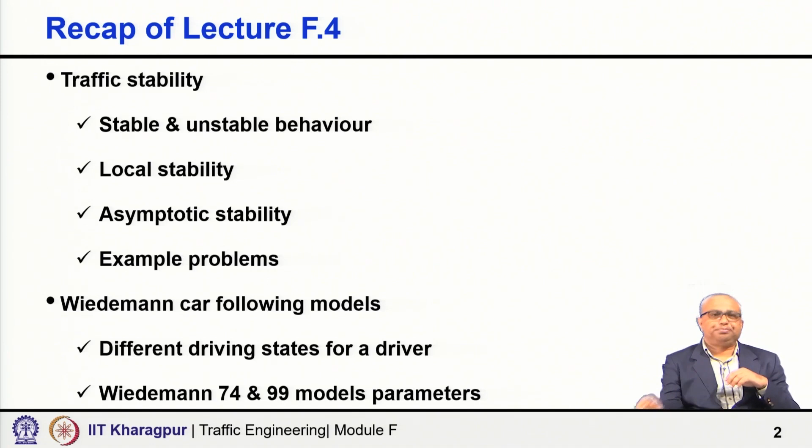With this background, today we go to a different topic, traffic simulation. Today's lecture covers some elementary aspects of simulation: what a system is, the different ways a system can be analyzed, and going up to what is traffic micro simulation. The next 2 lectures will specifically focus on traffic micro simulation.

When we talk about simulation, basically we are trying to analyze the system. So the discussion should start with what is a system. There are many ways a system can be defined. I have mentioned a simple way of defining it: a collection of entities which act or interact together towards accomplishment of some logical end. That is a very simple way of defining the system.

It is a collection of entities, not one but multiple entities, individually and collectively. They act and interact together through interactions to help accomplish some logical end, or collectively they achieve some objectives. You can also say entities or activities meaningfully connected, individually and collectively achieving the goal. So multiple entities, individually and collectively, they work, they interact with each other, and finally accomplish some logical end or achieve the given goal or objective.

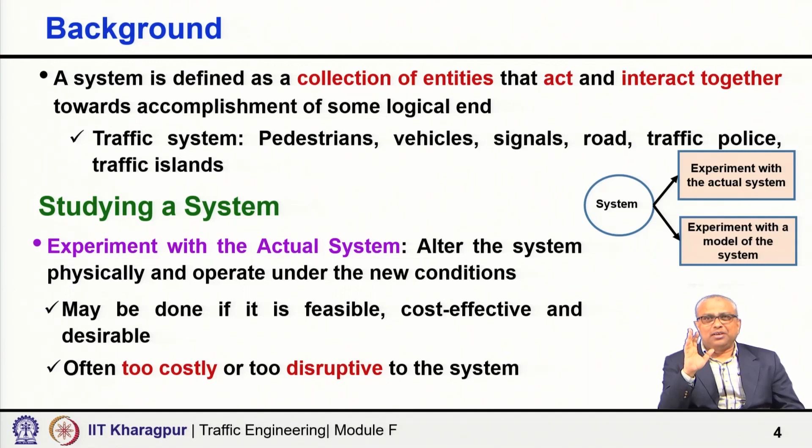So the alternative is the other one: experiment with a model of the system. We do not play around with the actual system, but we create a model, we build a model to represent the system, and then study various proposed alternative configurations with that model. So, not playing with the real or actual system, but playing with the model of the system.

That is fine, and there we can see different alternatives. You can see if I do a channelization, proper channelization in a signal at an intersection, how it works. If I use a traffic signal, how it will work. If I have an elevated corridor or some grade separator, how it is going to impact. Number of cases, number of possibilities you can check, you can evaluate, and then you can take a call.

So the experiment with the model of the system is much more practical, the scope is much bigger than the scope of playing around with the system itself.

So this is suitable when the system does not exist. There could be something that today does not exist. We are simply talking about a planning stage and we want to take a call. We have a forecast volume, we know what the turning movement will be, and this new road, once it is built, this new junction is going to come up. So it may not exist today, there could be many other examples.

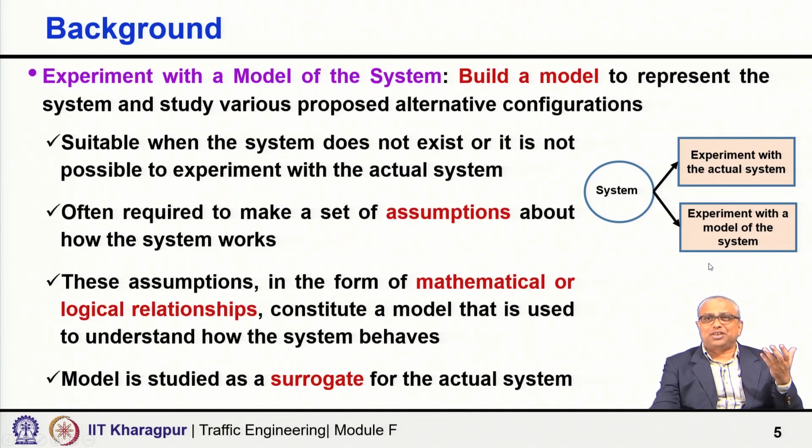If you go ahead with the model, within this we have experiment with the actual system, what is its scope, and the alternative is experiment with the model of the system. If we take up this experiment with a model of the system, again we have two alternatives. Either we develop a physical model and work with that, or we develop a mathematical model, not a physical model, and work with that.

So what is a physical model? We are developing a physical model, a replica - physically we are making something, and it is useful to build physical models to study engineering or management systems. Examples: clay cars in a wind tunnel - you make a model, the whole thing is a model, not the reality, but we create cars, we create wind tunnels. You can also do that for a rail system, how it works, you can make a physical model, or even a cockpit disconnected from the airplane may be used in pilot training.

You show them a photo, but you can show them a model also, right. You can even tell people, okay, go inside and sit there, see how the cockpit looks like, how it feels. So that is possible in many ways. The physical model range is quite wide, not just one thing. Many possibilities are there, and they're often very useful as well.

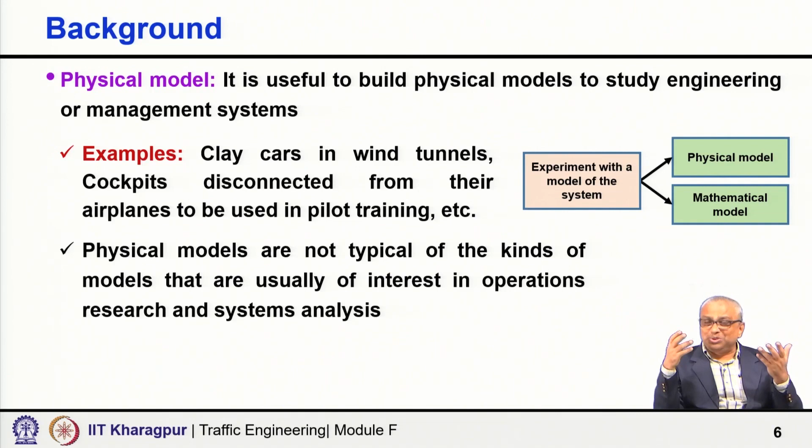So for operations research and system analysis, what we mostly do is go for a mathematical model. What is a mathematical model? A mathematical model represents a system - again, all models try to represent a system, physical models also try to represent a system. It represents a system in terms of logical and quantitative relationships that can be manipulated and changed to see how the model reacts, and therefore how the system would react, provided the mathematical model is a valid one.

The same model under some condition may be valid, under some other condition may not be valid. It all depends on what assumptions you are making, where you are applying the applicability of the model. Any mathematical model has its own application domain. I have taken an example here to explain this - maybe better examples are possible, but I have taken something simple.

You are all familiar with this: d equals distance travelled equals V, speed of vehicle, and t is the time spent travelling. Now what I am trying to show you is I am trying to create a scenario where this is a valid model, and where this is not a valid model. I am trying to create scenarios to explain this.

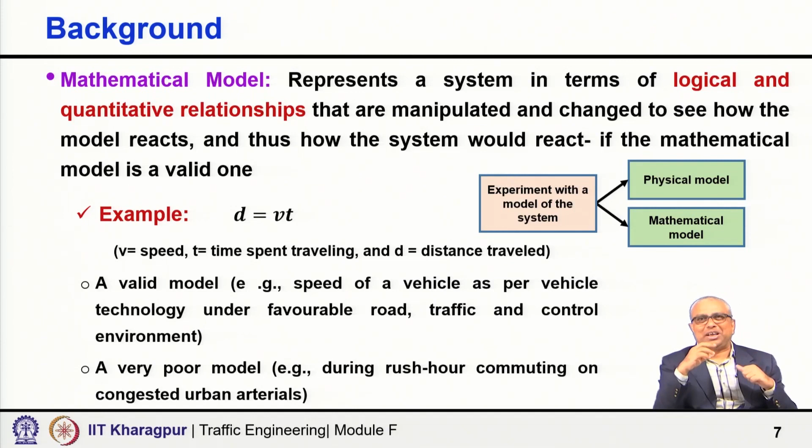So the applicability of the mathematical model is very important. Now suppose you choose the mathematical model for most cases, that is widely used, especially for the kind of work we do.

We cannot do every experiment in the field, because it's a public road, and once you are fairly confident about something, final field experimentation will be required. But the whole thing cannot be studied only based on field experimentation. I can do the final test in the field once I am confident, to see how it works in the real world. But I cannot do the whole experimentation every day, I cannot keep changing something and experimenting with people, because there are safety implications and other implications as well.

So suppose we take a mathematical model, then there are two possibilities: one is we can go ahead with an analytical solution, or we can go with simulation studies.

What is an analytical solution? If a mathematical model is simple enough, not so complicated, and the relationship is clearly understood, it may be possible to work with its relationship and quantities to get an exact analytical solution. If you can get it, that means the mathematical model is simple and you can get an exact solution, so we prefer the analytical solution. Why should we go for other kinds of analysis?

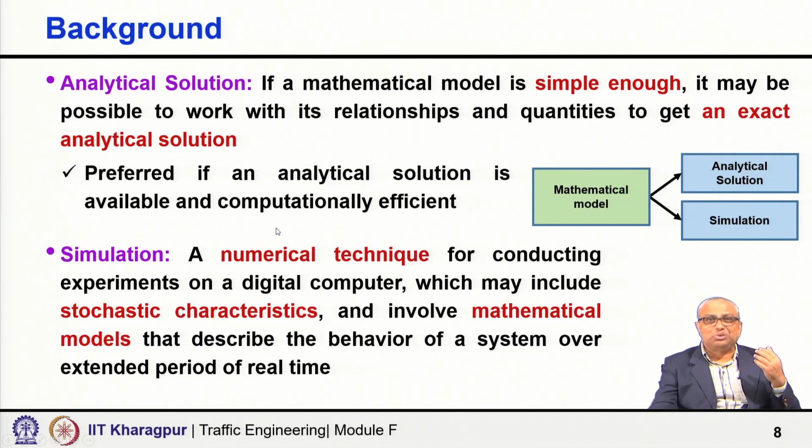In case of highly complex systems like the traffic system, so many entities interact with all other elements, making the overall process complex, and you cannot express the whole thing using one simple mathematical equation as we try to in an analytical solution. So in a highly complex system, valid mathematical models are themselves complex, precluding any possibility of an analytical solution. The model must be studied by means of simulation, that is, numerically exercising the model for the inputs in question to see how they affect the output measures of performance.

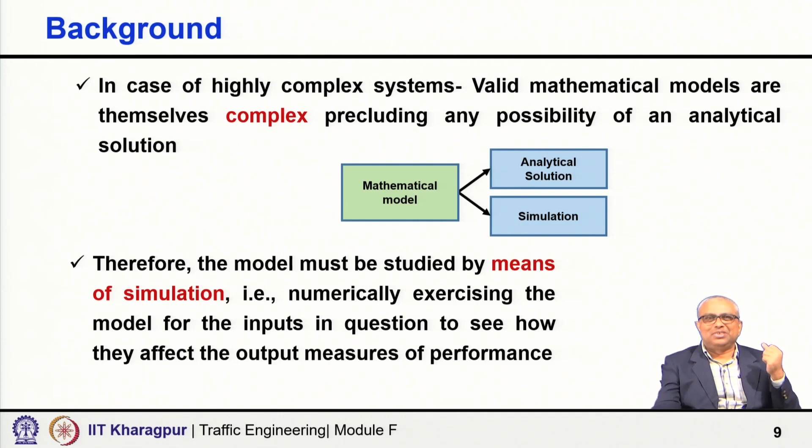The system can be analyzed by doing an actual experiment with the system, or by developing a model of the system. If you develop a model, it could be a mathematical model or a physical model. If mathematical, it could again be an analytical solution or a simulation solution. That is the context of simulation, and that's the path we wanted to travel quickly.

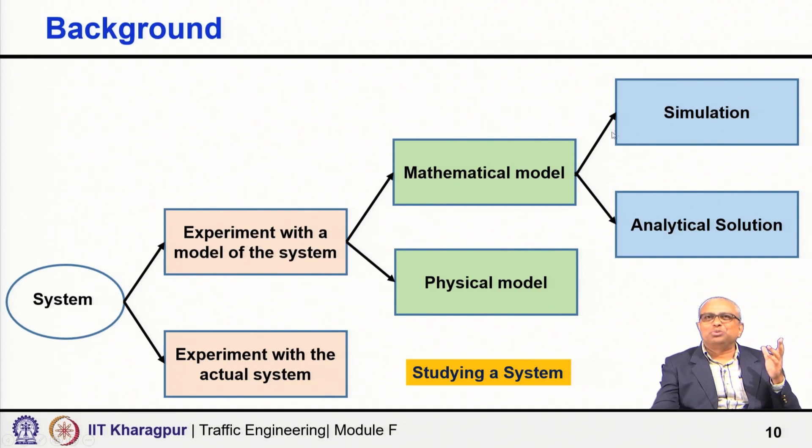Now, classification of simulation models. A simulation model may be static or dynamic, that is one way of looking at it. A static simulation model represents a system at a particular time, or a system in which time plays no role - it is not a function of time. Either the way we are analyzing ignores time as unimportant, or time simply does not play any role.

For example, you have studied traffic assignment models, which we can call static traffic assignment models, where you are analyzing the peak hour traffic state. So the peak hour volume is this, road is this, capacities are this, travel times are this, and so on, and you try to get what will be the equilibrium flow. That is an example of a static model. We can even simulate it too, often using iterative procedures with simulation, so that is a static simulation model.

Dynamic models represent a system as it evolves over time.

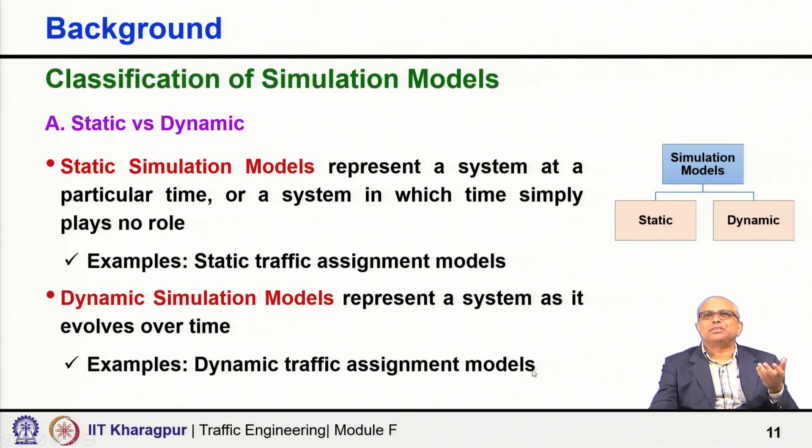So time is very important, the time clock is very important. Dynamic simulation model represents a system as it evolves over time, and the example could be the dynamic traffic assignment model. Another way of looking at simulation models is deterministic versus stochastic.

You are again familiar with this term. I have taught you this in the urban transportation systems planning course when I talked about traffic assignments, and even the concept of mode choice. But traffic assignment is a very apt place where simulation is used heavily, most appropriate to use simulation. So again, it could be deterministic or stochastic.

What is deterministic? When the model has no random variable, only deterministic variables are used. So all entity interactions are defined by exact relationships. That relationship may be mathematical, logical or statistical, but the exact relationship is known, and there is no involvement of a random variable. So when we simulate a process with no random variable, we call it a deterministic simulation model, for example, deterministic analysis of queuing. I have taught you in the traffic engineering course that queuing analysis can be done deterministically or stochastically.

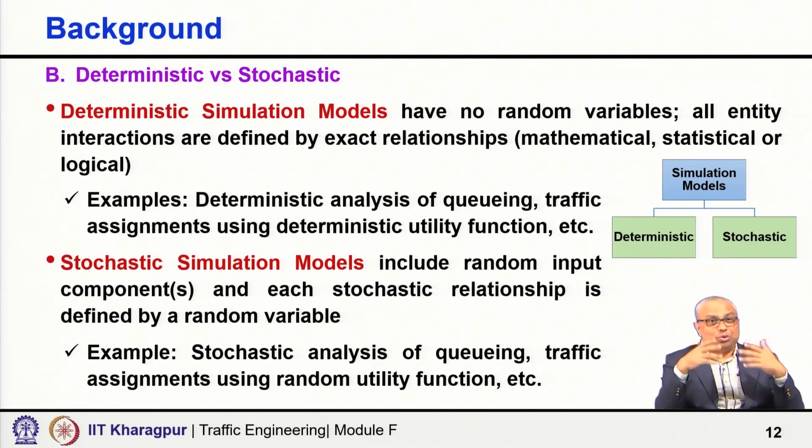Another way of looking at it is discrete versus continuous. A discrete simulation model represents a real world system by asserting that its state changes abruptly at points in time. A very simple example: the state of a traffic signal, say red, remains constant for many seconds, then suddenly changes to green, or remains green over a time period, then suddenly changes from green to red.

So whenever it is green, traffic is discharged, when it is red, discharge is zero - that's a discrete state. It could also be a continuous simulation model, which describes how elements of a system change continuously over time in response to continuous stimuli. A simple example connecting to this course: I have taught you about car following behavior in this module. If you use a car following model and try to get the distance headway at different times, plotting it to check traffic stability, using the same graph I showed earlier - that is a continuous simulation model.

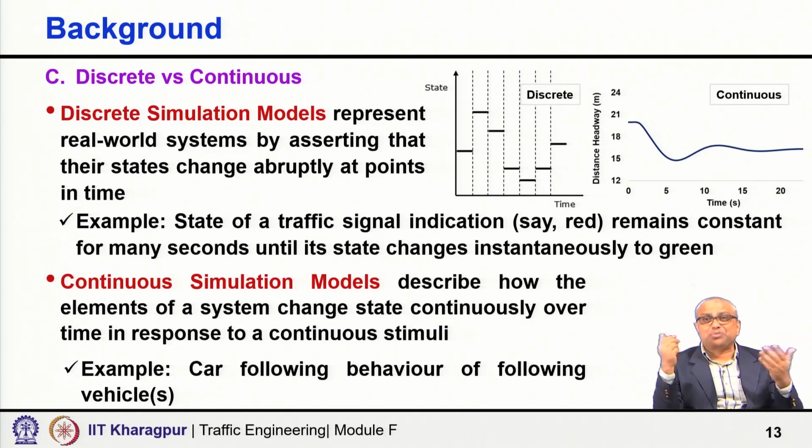Now, let us quickly discuss the principles of traffic flow modeling. Traffic flow can be modeled macroscopically, from an aggregate point of view. Macro means overall, based on hydrodynamic analogy regarding traffic flow as a fluid process. The state is characterized by the time-space evolution of aggregate macroscopic variables: volume, speed, and density. So overall macroscopic characteristics of the stream as a whole, represented by volume, speed, density, all functions of x and t, location and time, which change.

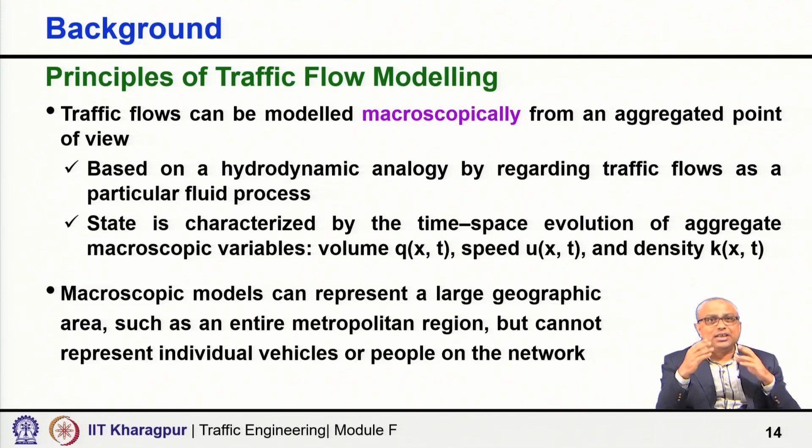Macroscopic models can represent a large geographical area. Macro means we want to analyze a larger geographical area, maybe the whole metropolitan region. Obviously, gross level, overall level analysis is more appropriate there. So it can represent the entire region, but cannot represent individual vehicles or individual people at an individual road element, like at a particular intersection exactly what is happening. That kind of thing is not of interest to us. Then we use macroscopic analysis.

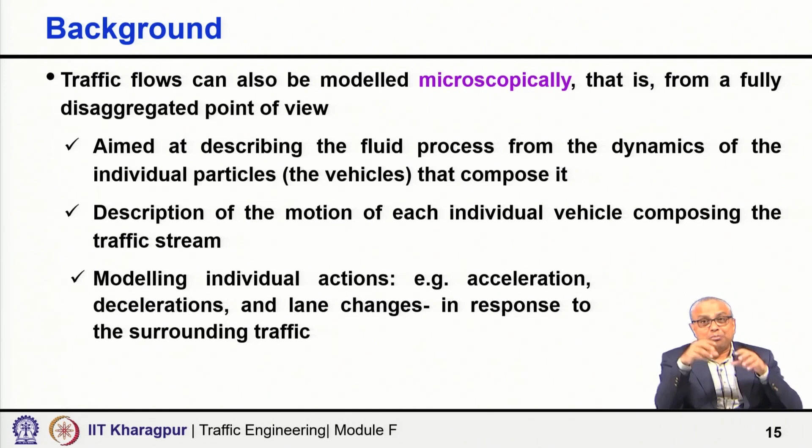It could be analyzed microscopically, micro, meaning a fully disaggregated, detailed point of view. Obviously, now we cannot think of the whole urban or metropolitan area. We are interested in a specific corridor, a specific intersection, and so on. It is aimed at describing the process from the dynamics of the individual vehicle, individual particles, drawing an analogy. So it is vehicles that compose it. Description of the motion of each individual vehicle composing the traffic stream. We are modeling individual actions, how each vehicle is accelerating, decelerating, or lane changing in response to surrounding traffic. That is the micro level, detailed level, how exactly a vehicle is taking a turn at an intersection, and how the intersection geometry influences that behavior, or how the behavior is influenced by intersection geometry. Micro level. So this cannot be applied for a large scale network.

The third, mesoscopic model, which is in between micro and macro. It represents a third, intermediate modeling alternative based on simplification of vehicular dynamics. There are two approaches we often follow. In approach one, individual vehicles are not taken into account; vehicles are packed into packages or platoons, and that we analyze. Another alternative approach is that flow dynamics are determined by simplified dynamics of individual vehicles, not as rigorously modeled as in the microscopic case. Every individual vehicle's acceleration, deceleration, lane changing, the depth of analysis we do there, we do not do here. So these approaches in a way combine, in some ways, microscopic and macroscopic aspects, not fully microscopic, not fully macroscopic. Somewhere depth would be there, but not for every aspect. So it's a balance between breadth and depth, and that is why it is neither fully microscopic nor fully macroscopic, but in between.

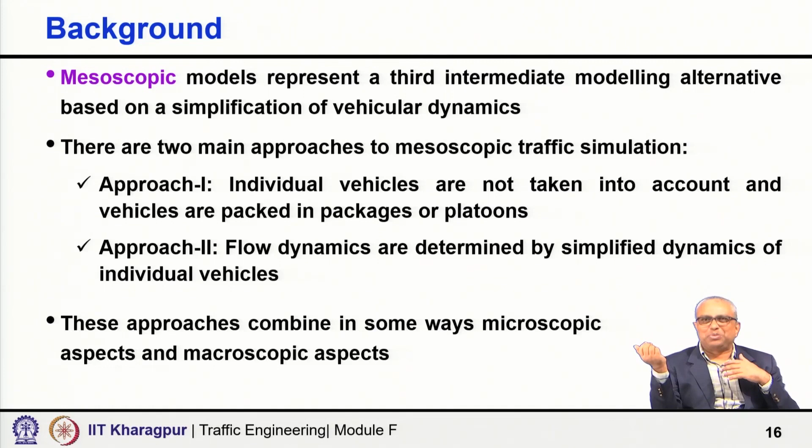So to represent it: at the macroscopic level, you analyze the whole urban area, a large geographical area. At the mesoscopic level, in between, a smaller area with a bit more detail, not the whole big area, but maybe a part of it. At the microscopic level, an individual link, an individual junction — what interventions we do, how the junction will behave. If I have bus priority, if I give a queue jump lane, for different lengths of queue jump lane, different design parameters, how exactly the intersection will behave, and what would be the delay to buses, what will be the delay to cars — all these detailed things, that is the microscopic level. So generally a simulation model could be operated at the macroscopic level, and traffic analysis is the same — it can be done at the macroscopic, mesoscopic, or microscopic level.

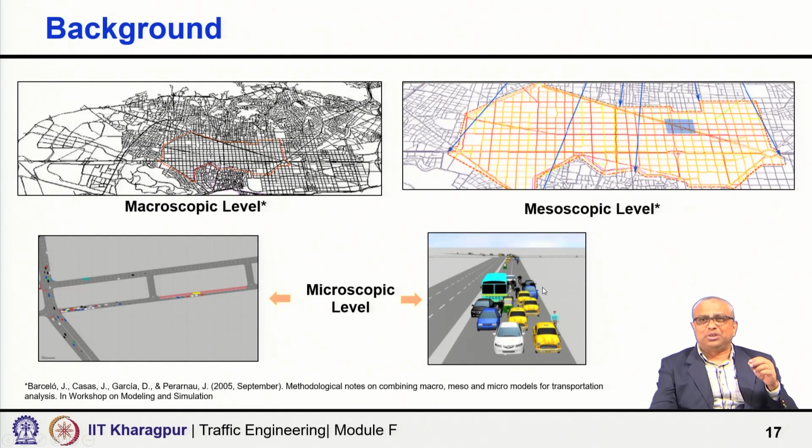With this background, I will stop, and the next two lectures will focus only on traffic microscopic simulation. We will focus on how we do micro simulation, traffic micro simulation, entirely. So what we discussed here: how to study a system, what could be the classification of the simulation model, what are the different ways we can classify it, and some basic principles of traffic flow modeling. This is also a decision of whether we want to do analysis at a macroscopic level, mesoscopic level, or microscopic level. With this background and overview, I close this lecture.